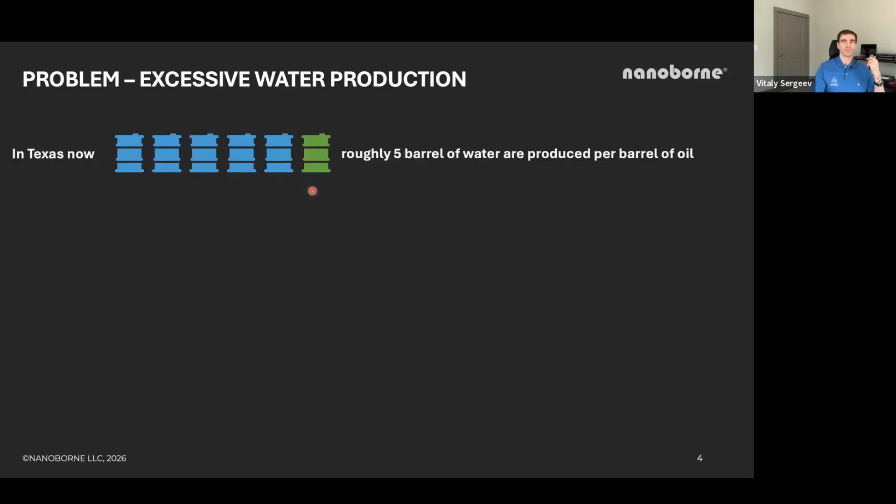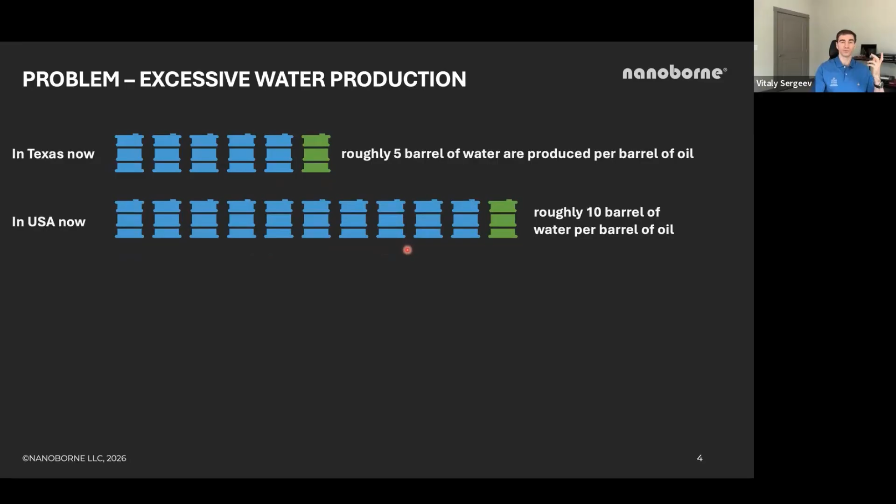If we take a wider look at the whole United States, you can see it's actually double the water that needs to be produced per 1 barrel of oil, on average for the United States. And of course, if you need to lift a lot of water to the surface, you have issues—and those issues are here.

You can see the produced water cycle—it's actually very simple. At step one, you lift up the water that you don't need. Then, because you have it at the surface, you need to treat this water. You spend a lot of energy at these two steps, because you're lifting it up, consuming a lot of energy, and at the same time it limits your oil recovery—the fact that you produce more water than oil limits your oil recovery. Then you treat this water and need to pump it back, because you can't just leave it on the surface, and you can't just discharge all the produced water into freshwater sources, because it will be saline. So this cycle is an enormous expenditure of energy, and of course there's carbon dioxide emission, and chemicals going to the surface that end up left over and contaminating everything around it.

So producing less water can bring benefits to everyone. When we talk about the environmental adversities of produced water, right here in West Texas there's a lot of issues with induced seismic activity—in simple words, earthquakes. Just imagine how much water needs to be pumped back subsurface to initiate an earthquake. That's the massive scale we're talking about.

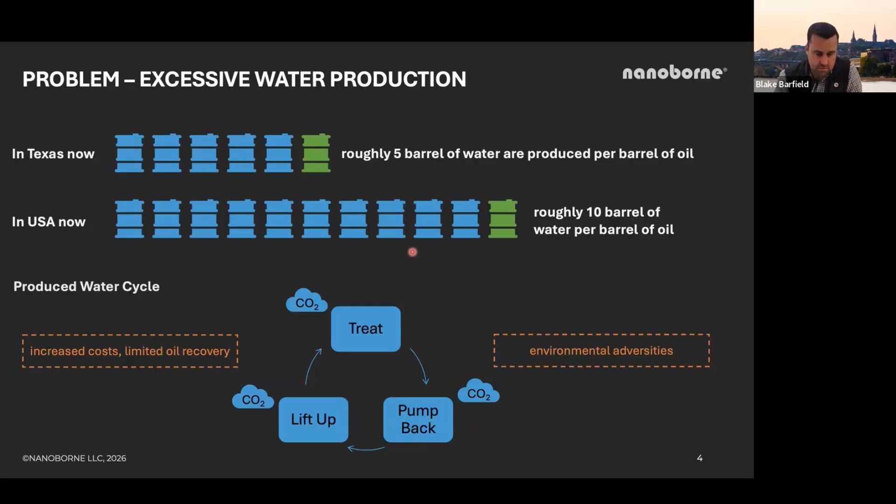Vitaly, this is a really good slide. I wanted to pull one question out: could you talk about why there's such a difference in some basins in terms of the amount of produced water? Is that an age of the reservoir? Is it age of production? Is it onshore, offshore? Each of those are large numbers, but one's 2x the other.

That's a great question. Nowadays in the United States, the oil and gas industry pumps back subsurface 20 plus billion barrels of water a year. That's huge, enormous, you can't really comprehend how much it is. The major contribution to that is the age of the reservoir. Because of the maturity of the reservoir - average reservoir in the United States is about 25 to 30 years - you produce a lot of water because a mature reservoir will give you more water than oil.

That's a major problem. If we take a look at the Middle East, for example, there are countries which are pretty fresh with the reserves and they produce very little water. But there are also countries like Oman. Oman produces even more than United States on average per barrel in terms of how much water they produce. So it's all about how old the reservoir is, and on the other hand, it's about what technology you used to postpone that additional water production and decrease it.

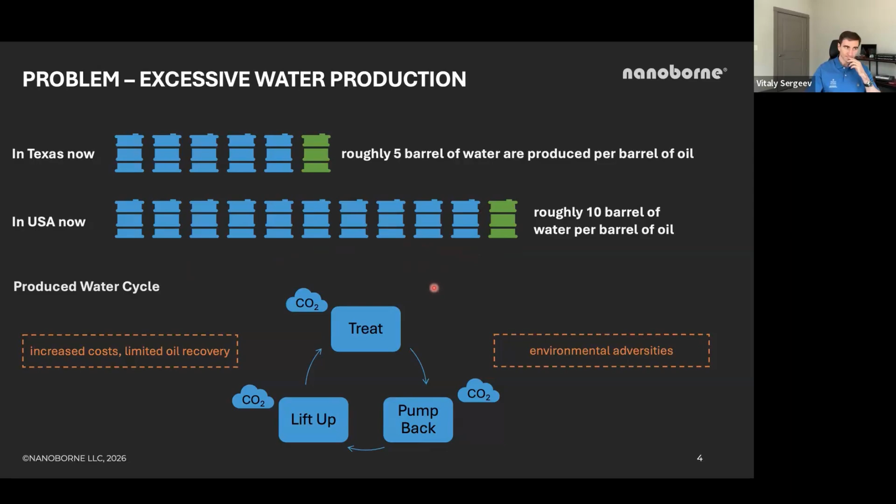Great, thank you. Okay, let's go further and talk about what exactly excessive water brings to the oil company, why it costs operators millions. Number one is operational inefficiencies, because water production requires a lot of energy, increases equipment wear and tear, and compounds the production cost. So basically you have to spend more money and do oftentimes workovers to prevent your field from breaking down.

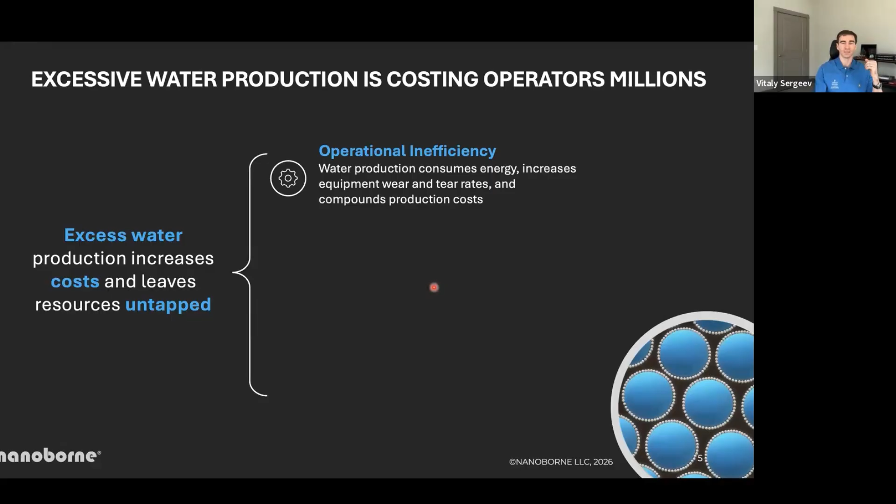The limited resource recovery is another issue, and it's actually very simple. Understand it through the lens of how much you can extract from the reservoir depends on how much you produce now, oil versus water. If you produce less water, you can extract more out of the same reservoir. So producing less water directly benefits the nation - you can keep sustainable energy supply for a longer term with less energy consumed for it.

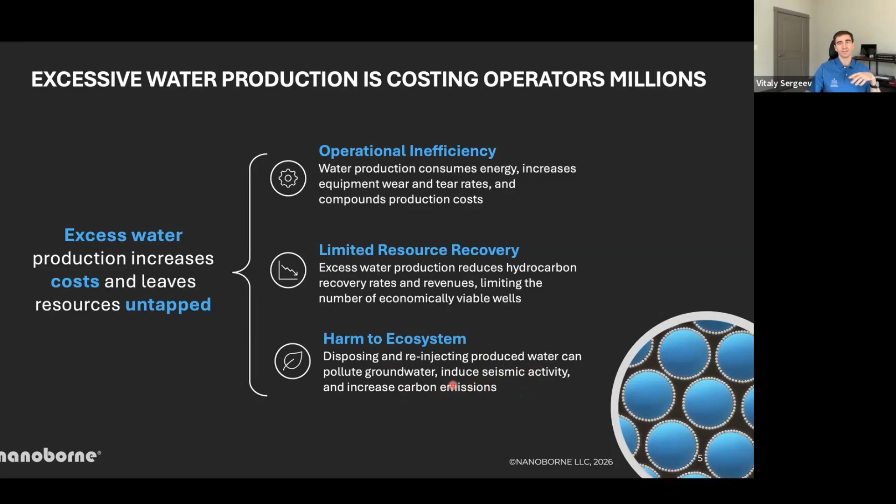And the harm to the ecosystem - it's about disposing and re-injecting the produced water, because it does pollute groundwater and induce seismic activity. There's also increased carbon dioxide emissions because of this. So these three are real problems, and they impact significantly globally.

Another important aspect is what I mentioned earlier - what contributes to that huge amount of water produced. It's the technology you use to develop the oil and gas reserves. Nowadays, water control solutions are poor, they are not great. The majority of what's used in the world is synthetic polymer. Synthetic polymer, in simple words, is basically plastic - we pump plastic subsurface to prevent water from coming out. You don't want that for sure, right? You can see on those pictures how synthetic polymer derivative looks like after it went into the reservoir and been pumped out to the surface - it looks like a gummy bear, a very ugly one maybe.

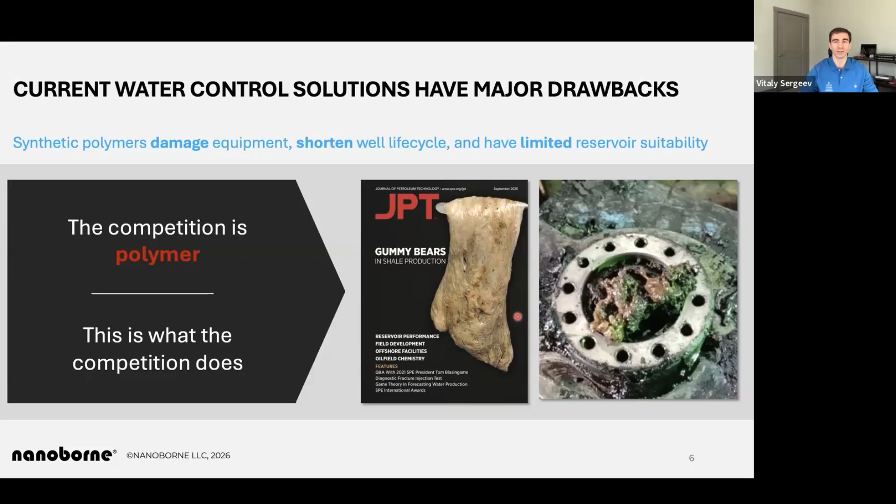So we don't want that, and the solution we offer is nanotechnology. The product we have is a nanosurfactant emulsion, and this nanosurfactant allows us to effectively control the flow of hydrocarbon and water subsurface. It's a liquid product, and we use a process technology to combine this chemical with the water and hydrocarbon phase at the well site. We mix these three components - water, nanosurfactant, and hydrocarbon. When mixed, it creates a nanoemulsion, and all of those droplets are so small that they are submicron size, which improves the stability of the system.

You can also notice that there is a nanoparticle adsorbed at the interface of each globule. So between the water and hydrocarbon, because of the electrical charge of the nanoparticle, you will see adsorption of this particle and creation of an armored layer. Basically this acts as armor, because those globules cannot coalesce - there is a physical barrier between them. That's what we invented. So this nanoemulsion is super stable, and at the same time it has no synthetic component in it - we don't use gels, we don't use polymer, it's just these three components, that's it. This emulsion will degrade with time and separate into two phases, water and hydrocarbon. So it's a 100% gel-free system, and it's good for the environment.

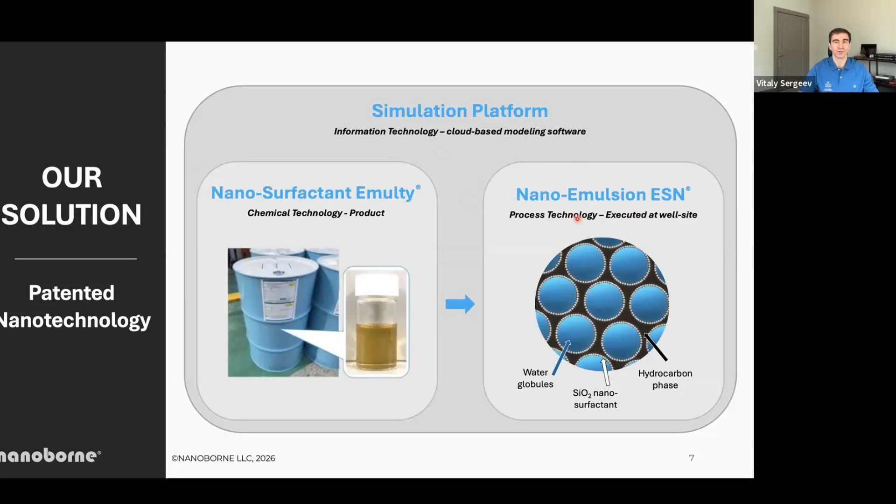So how the business works. Now you know a little bit of our tech, and now let's talk about how business works. So we have a pretty much integrated business process.

As I said earlier, at step one, we will gather the geotechnical data from the end user, and then we will analyze it. We will do the design for the technology, and we will forecast the effect of the technology implementation. So this is our IT part.

At step two, we will produce the nanosurfactant because now we've designed the treatment. We know how much we need to produce and what type of surfactant it should be. So here the chemical technology part is in play.

At step three, there is a process technology part at play. As we discussed earlier, what do you need to do? You need to bring our chemical to the well site, mix it with water and diesel normally, and then it can be pumped directly into the well. So these three components are the elements of our business process.

And here we have a summary of what you can do with the ESN technology applied to the industry. First of all, reduced water cut is one of the most important parts of what the tech does. It selectively reduces water production without impeding oil flow. That's what it's all about. You don't need to produce water, so leave it subsurface.

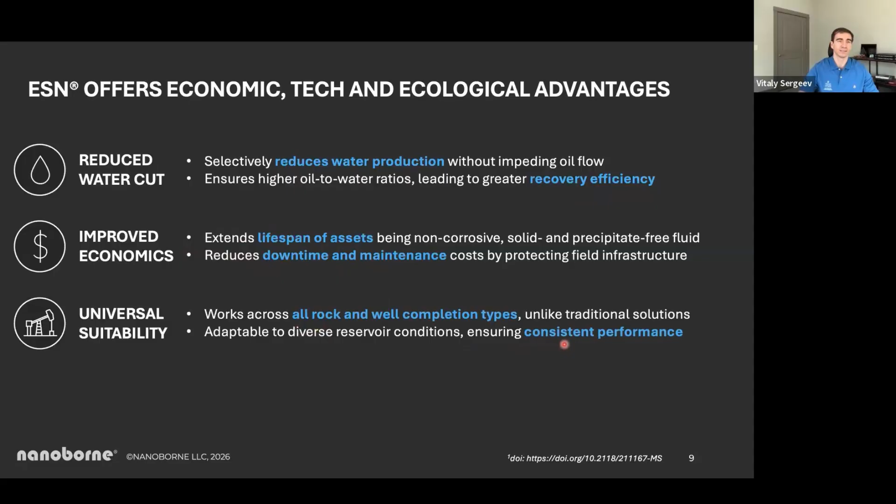...compatibility of the fluid. Our fluid, because it is simple, is very compatible. So you can use it over all rock types, all types of wells, etc. So the performance will be consistent no matter what type of reservoir you have.

And the last one is, of course, lowering emissions, because as we discussed earlier, the system self-degrades subsurface. You don't need to do anything for it. It minimizes ecological impact. And there are studies where experts evaluated our tech and said that we can decrease CO2 emissions by 30% with the use of our technology for just typical standard operations in the oil field.

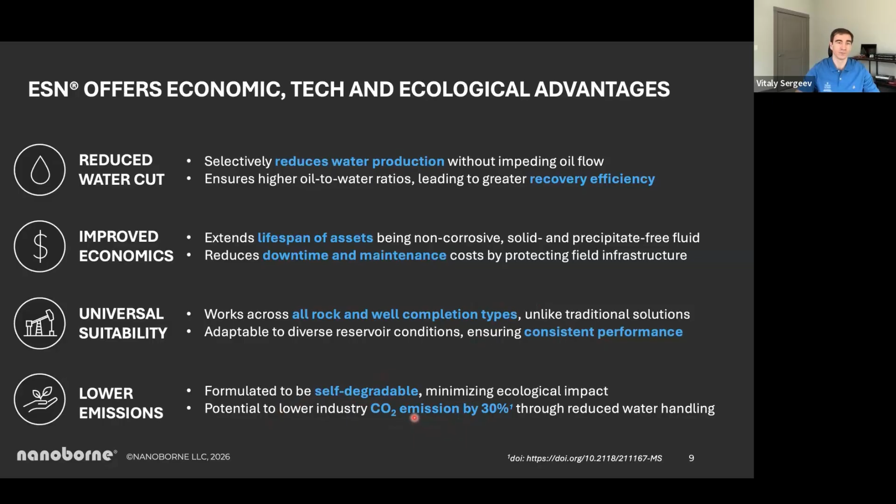So don't be scared of this page. It's actually pretty simple to read. We have here highlighted that our technology implementation delivers a 70% increase in oil rate, on average for all applications. And here you can see that it decreases water cut by 16% on average.

And here, this is a real example of how the tech delivers its efficiency. The green line is the oil rate of the well, and the blue line is the water cut. You can see the area before, and the gap where the technology was implemented, and then the area after, which is the effect.

You don't produce that much water anymore. You produce much less water. At the same time, you increase the efficiency of the production. And that brings sustainability to the process, because that allows us to produce more from the same reservoir while delivering higher efficiency.

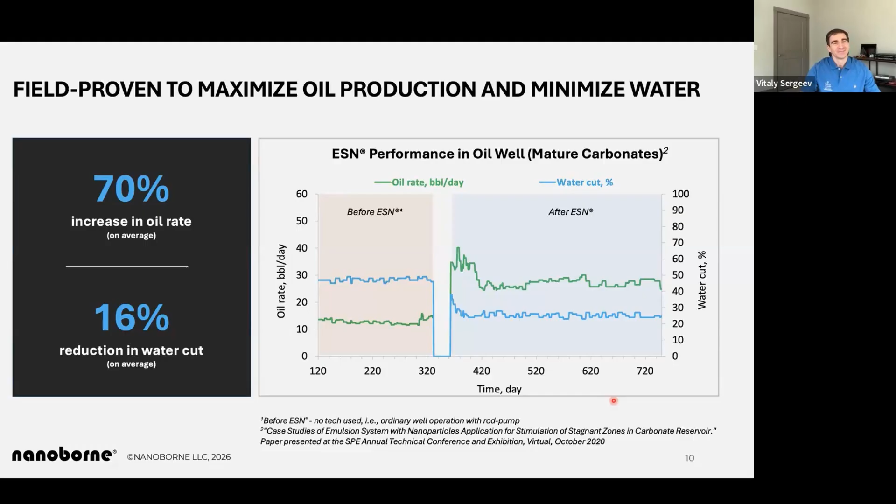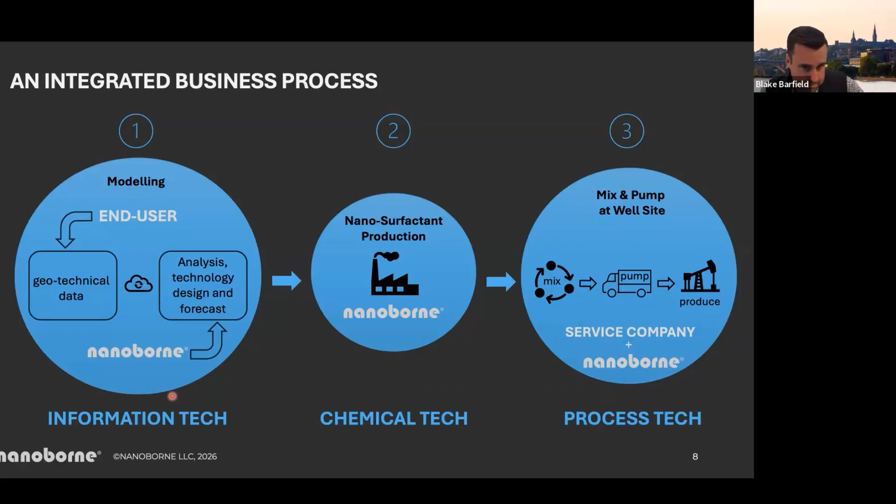I'm thinking about this as, you're a startup, and this slide says you're a startup with 3 startups inside of it, if I'm interpreting this correctly. So you've got 3 verticals here, each with different needs, from the modeling to the actual production of the material to the sales and use case. Could you talk about which of those has been the most challenging? Is there one that's been more difficult to stand up and go to market with than the others?

Yeah, you understood correctly. We have three technologies combined in one business process. I would say the hardest part will be the implementation, because it involves another party and it generates the majority of the cost for the end user. So the end user will spend a lot of time with you to figure out how to decrease their own cost on step 3. That's what we observe nowadays. Everyone tries to decrease their cost. Oil and gas is sensitive to oil price fluctuation, and when the oil price is near 50 and not above 70, they are pretty cost sensitive, so they will do everything to decrease their cost. That I would say is the hardest part, and I believe that's universal - it doesn't matter what industry you're in, the end user will follow the lowest cost idea.